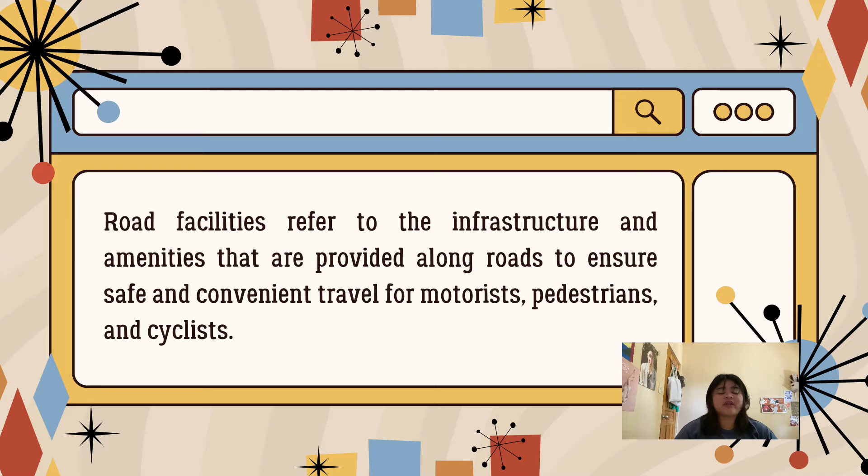Road facilities are infrastructure and amenities provided along the roads to ensure safe and convenient travel for motorists, cyclists, and pedestrians. Here are the common road facilities.

Number one, road signs. These signs are placed along the road to provide information like hazards, road conditions, directions, and speed limits. Traffic signals are used to control the traffic flow.

Road marking - symbols and markings that serve as a guideline like lane dividers, arrows, and crosswalks. Street lighting - street lights are installed along the road to provide illumination during nighttime, also to improve visibility and safety. Pedestrian crossing - these are designated areas on the road where pedestrians can safely walk.

Bicycle lanes - from the word bicycle, of course, this is for our cyclists, to provide a safe space for them. Roadside rest area - it is usually located in highways and major roads wherein motorists can take a break or use the restroom or when they have an emergency.

Clear zone. A clear zone is an unobstructed, traversable roadside area that allows a driver to stop safely. In simple terms, this is the clear zone where a vehicle can move without any conflict. A clear zone is also a designated area to provide a safety buffer for errant vehicles and also to minimize the severity of crashes, since on highways we can't avoid accidents or crashes. The width of a clear zone is based on the traffic volume, speed, and slope of the highway.

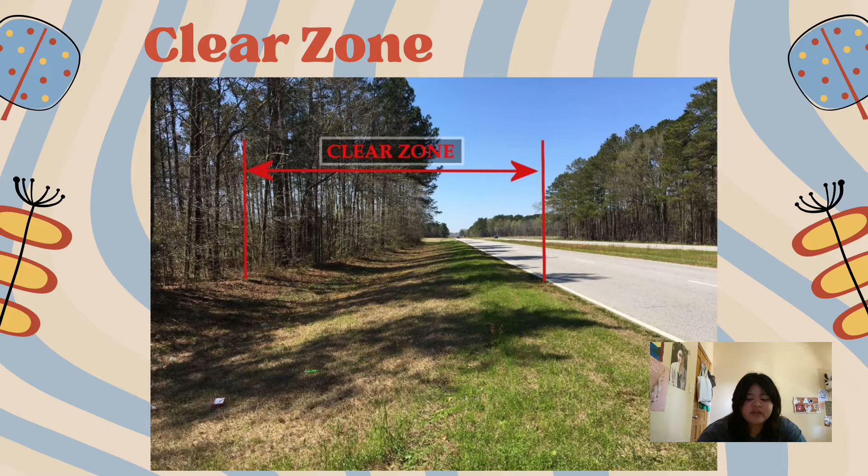In the next slide, we can see an example of a clear zone. On the side is the travel way where vehicles pass. The two vertical lines, the red vertical lines, represent our clear zone. Then the slanted part is the slope. That slope is a traversable slope, which can be recoverable or non-recoverable. The traversable slope is the slope with a clear run-out area.

Here are the benefits of a clear zone. Number one, safety. Enhanced safety - by providing a clear area alongside the road, the risk of collision with fixed objects is reduced. This helps to protect vehicles and occupants and minimizes the severity of crashes, just like I mentioned in the previous slides - one of the functions of a clear zone is to minimize the severity of crashes.

Second, we have improved recovery space. If a driver loses control of their vehicle, a clear zone provides additional space for them to regain control and safely return to the roadway.

Third, we have increased visibility. A clear zone allows for better visibility of road signs, traffic signals, and other important roadway features, improving driver awareness and reaction time. And lastly, we have accessibility of emergency vehicles. A clear zone ensures that emergency vehicles can easily access the road in case of emergency, reducing response times and potentially saving lives. This is useful for ambulances, or when an emergency occurs on the roadway.

So what is a safety barrier? A safety barrier is a physical or virtual structure designed to prevent or limit access to dangerous or restricted areas. It is used to protect not just people but also property, from potential hazards or accidents.

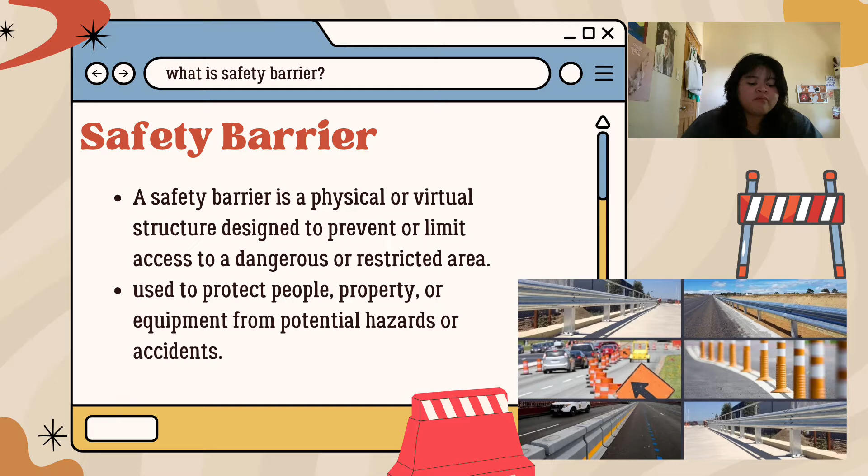Most of the barriers we see along the roads are made of steel, concrete, plastic, or wire mesh, and usually they come with a warning sign or signal on the side to alert motorists of potential accidents. So the main purpose of a safety barrier is to create a safe environment by controlling the flow of vehicles and reducing the risk of accidents.

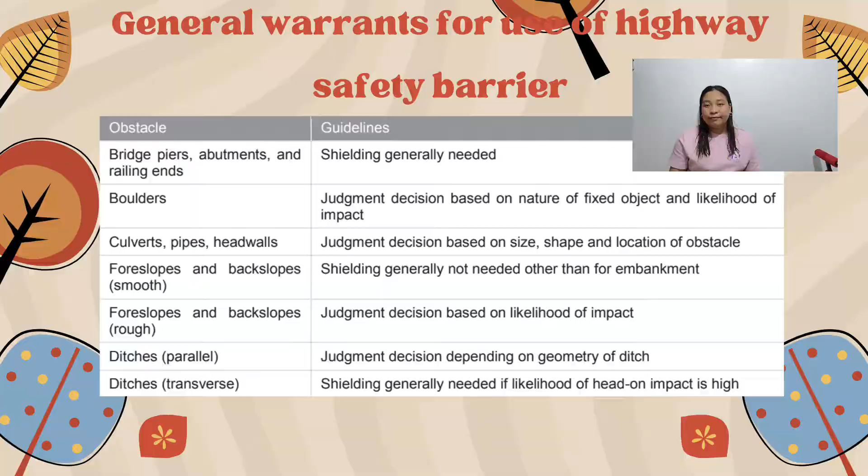So let's proceed to the types of safety barriers.

First is wire rope barriers. Wire rope barriers are utilized to stop motor vehicles from being sidetracked. Roads are placed with wire ropes or cable barriers on the sidelines. These are built with solid vertical posts with 2 to 3 horizontal ropes. They are selected for their lower cost and effortless upkeep while still providing visibility. It is a type of roadside or median safety traffic barrier or guardrail. You can mostly see it on big roads like SLEX, where you may notice they have placed a median safety traffic barrier or guardrail.

Next is the A-frame barrier. An A-frame barrier is a kind of barricade that is mostly utilized for low traffic zones. It is generally built of a horizontal board with reflectors on its edges. Due to its lightweight layout, it is not suitable for highway traffic zones. It is normally put to use for short-term construction projects, school areas, and crowd control.

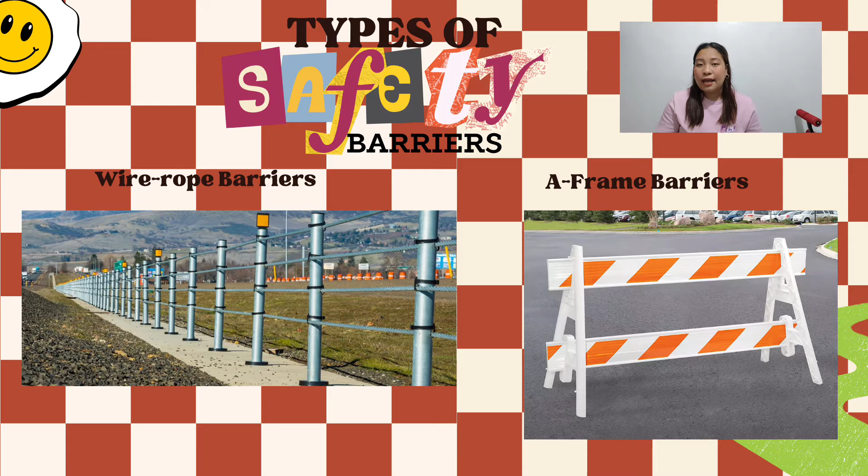Next is delineator tubes. Unlike other barrier types that have broad footprints, delineator tubes have a narrow layout. These are utilized to signal danger to incoming pedestrians and vehicles in places serving as barricades. Due to their height and neon colors, these are located on roads with low visibility to assist and aid drivers.

Next is concrete barriers. Concrete barriers are rigid structures made of concrete that are used to separate and protect areas, control traffic flow, and provide safety in various settings such as roadways and construction sites. Concrete barriers prevent vehicles from entering the opposite lane and going off the road. An important factor in the design of concrete barriers is the impact load, which a vehicle exerts upon collision with a concrete barrier.

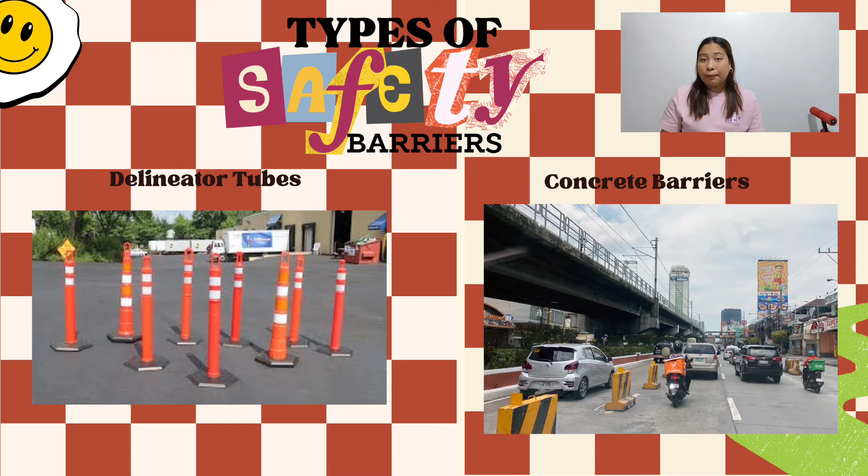Next is longitudinal channelizing devices, or LCD. These units are used to delineate or channelize vehicles and pedestrians. LCDs help address work zone safety by preventing pedestrians and vehicles from entering work areas.

Next is plastic barriers. They offer highly visible pedestrian safety, which can be particularly useful in guiding pedestrians around or away from roadworks, minor excavations, or hazards.

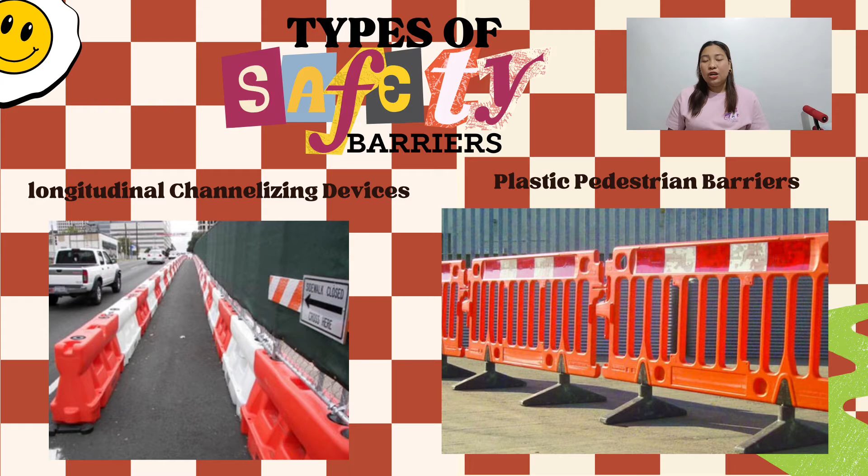And last is traffic cones. The main purpose of traffic cones is providing safety and sending an alert to the people who are driving on the road. These cones mostly indicate that some construction is going on ahead or that the area is not safe to drive through.

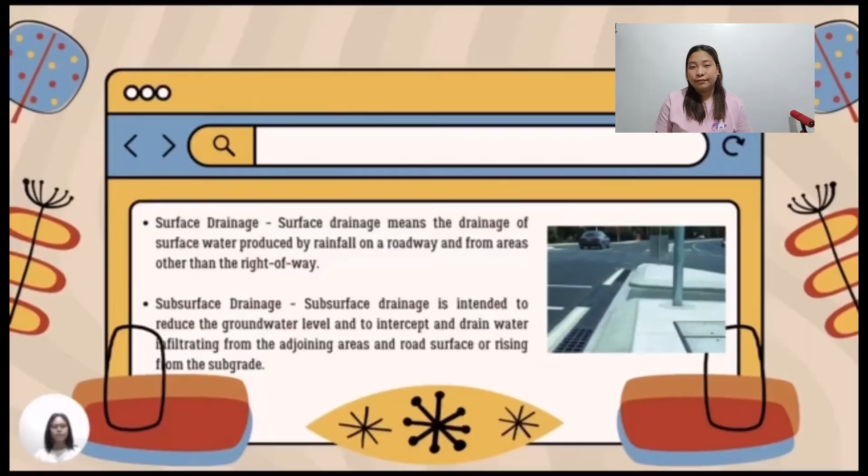I'll be reporting about the drainage facilities and motorcycle facilities. But first, let me discuss two types of drainage facilities.

We have surface drainage. Surface drainage is the system to control water runoff from the road surface in order to stop erosion, flooding, and damage to road infrastructure. It also involves planning, design, and construction such as gutters and culverts.

Second, we have subsurface drainage. Subsurface drainage is the system of pipes and structures installed under the road surface to manage the flow of water. This is crucial to avoid water accumulation and prevent pavement damage, in order to ensure the stability and longevity of the roadway.

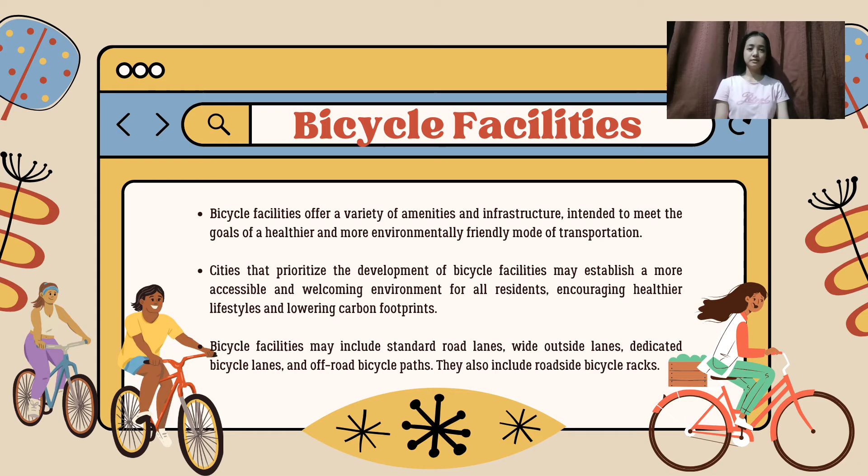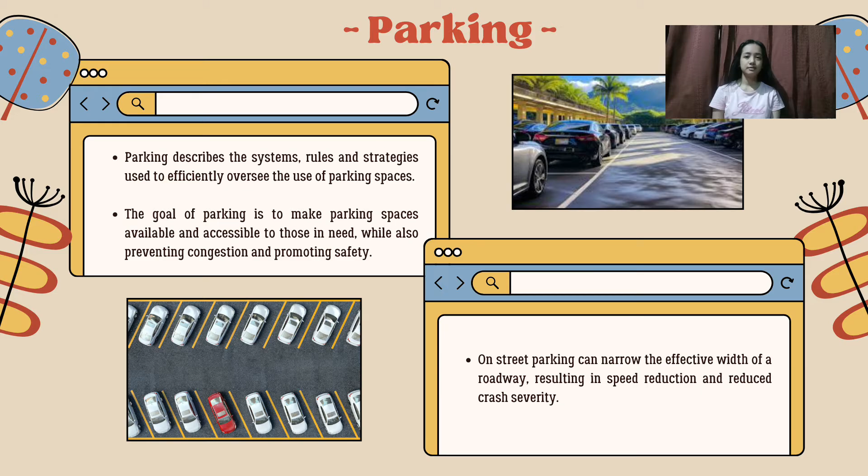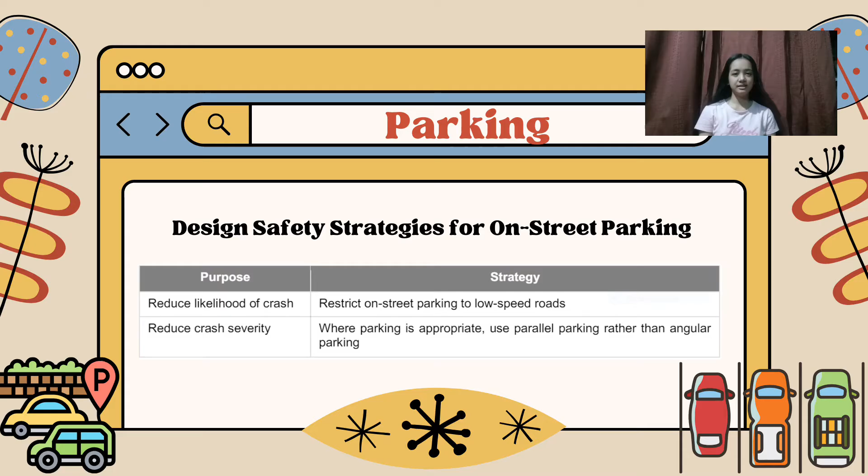Hello, I'm Christopher Ryan Faustina Correa, and the topic that I will be discussing is pedestrian facilities.

Now, what are pedestrian facilities? Well, pedestrian facilities serve as the very foundation of multimodal transportation systems, meaning the travel of goods and people through roadways.

Some examples of this are via motorcycle, car, walking, cycling, or running, which can all be part of a multimodal transportation system. AASHTO says that walking is a fundamental form of transportation since all travelers are pedestrians at some point, and many travelers go out on foot or walk as a form of recreation and exercise.

What does this mean? It means that even if you're traveling by car, bicycle, or motorcycle, you are a pedestrian at some point. For example, if you're going to the store by car, you'll have to get off to buy your things and pay for them, meaning that at some point you are a pedestrian.

Also, a lot of people walk or run to gain exercise. A lot of disabled people do that as well, using it for exercise and recreation.

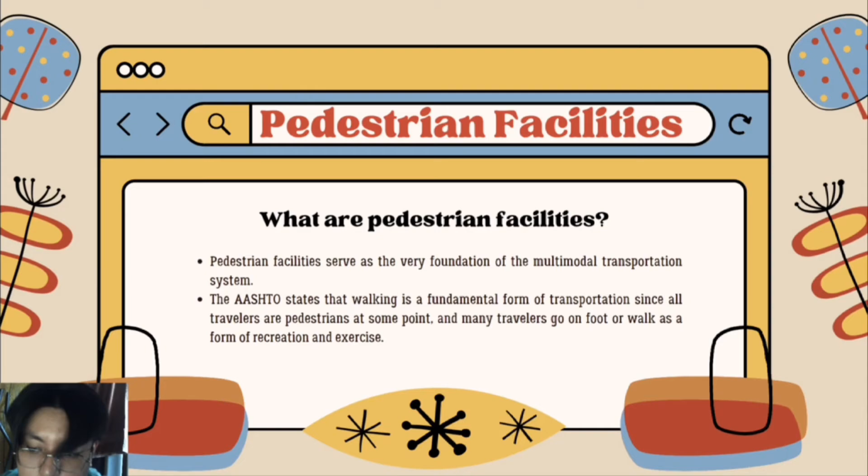Some examples of pedestrian facilities include sidewalks, walkways, and crosswalks. Sidewalks should have a 4 feet clearance in residential areas and a range of 4 to 8 feet in commercial areas, meaning the sidewalks by your house are minimum 4 feet, and the sidewalks at places like malls are 4 to 8 feet minimum.

Another tidbit on sidewalks is that there are more sidewalks in urbanized areas such as cities, and less in rural areas, since in cities there are a lot of cars and vehicles, meaning a lot of sidewalks are needed. Meanwhile, in provinces, that's not as much the case.

Walkways are abundant in rural areas and few and far between in urban areas. You can see a walkway maybe in a park in urbanized areas, but more often you see them in provinces, since there isn't as much need for sidewalks, but there is a need for walkways, since walkways provide a path cutting through nature or terrain, providing easy access.

Crosswalks, like sidewalks, are more popular and more prevalent in urbanized areas, since a lot of people need to go to the other side of the street. You have to cross the street at some point in urbanized areas, thus creating the need for crosswalks.

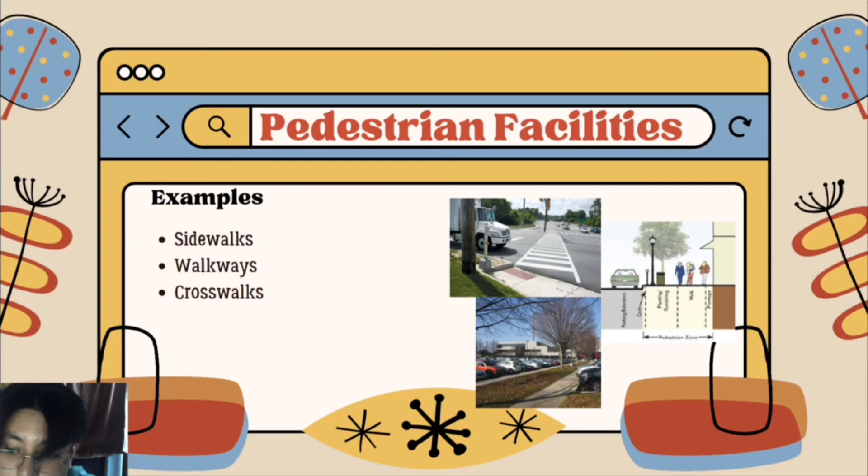What are the uses and purpose of pedestrian facilities? Well, one can be safety, since it says here that it reduces motor vehicle-pedestrian crash likelihood at roadside locations. You don't really see a lot of accidents at sidewalks, since a lot of people have the understanding that it's very safe, and it's put there for a purpose. No motorist will go to a sidewalk willingly. For example, cars won't go there, and motorcycles maybe sometimes go there in the Philippines, but in other countries, more often than not, they won't.

Reduce severity of vehicle and pedestrian crashes at roadside locations. This ties into the point I previously mentioned. Even if there is an accident there, it would be very likely to be a very minor one, since vehicles and motorists are trained to swerve when approaching a sidewalk, as well as the curb of a sidewalk is very high. So even if they lost control of the vehicle and it's going to a sidewalk and they can't help it, the curb will provide some amount of force resistance, since the curb is very high. I believe it's 4 to 8 inches.

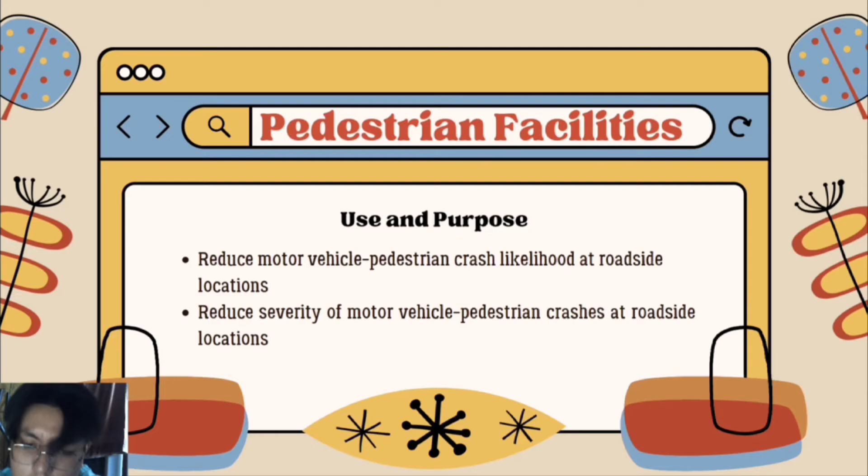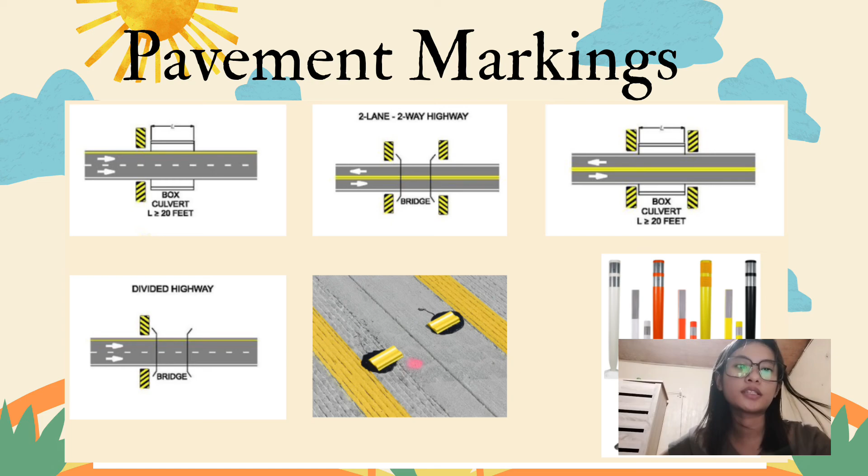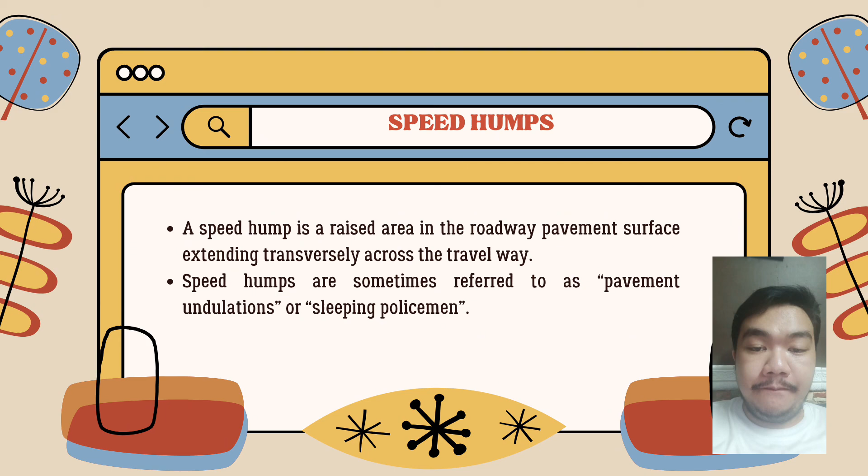And ang purpose nitong dalawang to is to provide protection to civilians in locations such as school zones, residential areas, and parking lots, and to slow down vehicles to prevent accidents.